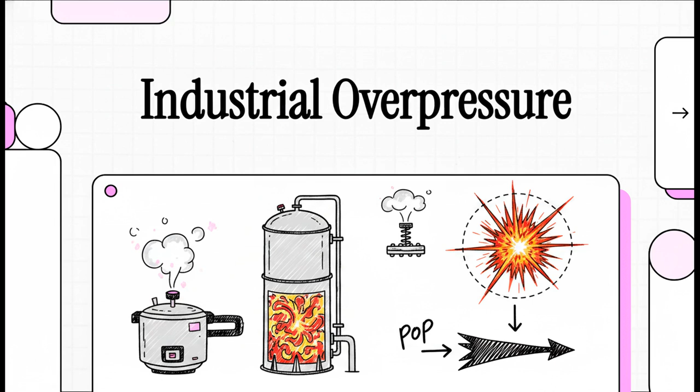Today, we are unpacking the incredible, frankly invisible engineering of industrial safety, specifically looking at how facilities use highly specialized mechanical devices to prevent overpressure disasters. To really understand this, we're going to use API standards 2000, 520, and 521 as our blueprint today. We're going to cover the actual threat of overpressure, the specific pressure relief devices themselves, how engineers mathematically size those relief valves, the rules for safe installation, and finally, disposal systems like flares and drums.

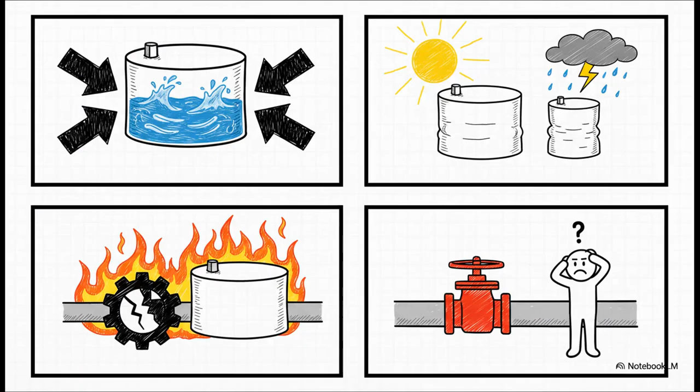Okay, let's dive into this with Section 1, the threat of overpressure, its causes and the stakes. Because honestly, before we can talk about the solutions, we really need to understand the threat itself. Why do these massive, heavily reinforced steel tanks even need venting in the first place? Well, the standards outline several primary scenarios that cause internal pressure to spike dangerously high, or, and this is just as bad, drop so low that it creates a crushing vacuum.

First, you've got simple liquid movement. Just pumping massive volumes of fluid into or out of a tank displaces the vapor space inside. Then you have extreme weather. Imagine a sudden drop in temperature or a heavy rainstorm that can rapidly cool a tank, condensing the vapor inside and instantly creating a vacuum. We also absolutely have to plan for external fire exposure, which essentially boils the liquids inside the tank like a kettle. Furthermore, you've got equipment failures.

Think of a choke collapse in an oil well that suddenly unleashes this massive high-pressure flow. And finally, human error during maintenance. This includes things like inadvertently leaving isolation valves closed or steaming out a vessel to clean it, which causes drastic pressure shifts. So you can see the stakes in these industrial operations literally couldn't be higher.

So how do engineers actually protect against all these scenarios? API 521 outlines a very strict hierarchy of protection. Step 1, you try to avoid the risks altogether. Maybe you design the vessel to withstand the highest possible pressure from any source. But if that's not possible, you move to Step 2. You rely on engineering controls. And this is exactly where our pressure relief devices come in. Finally, you have administrative controls, like manually locking certain valves open.

Notice the crucial emphasis here on engineering controls. While automated instruments and administrative safety procedures are fantastic, they are absolutely not a substitute for physical mechanical pressure relief devices. Think about it. If the power goes out or a computer completely crashes, a mechanical valve is still going to operate.

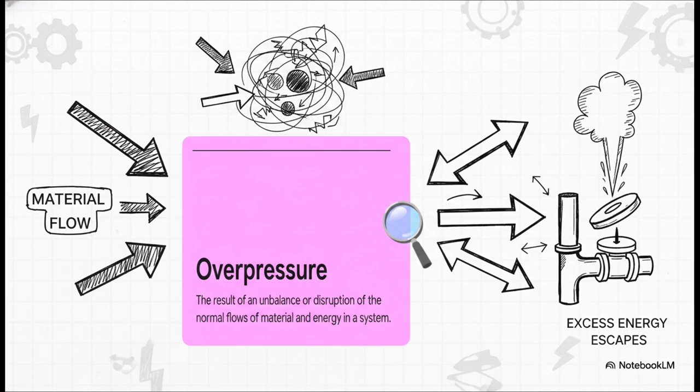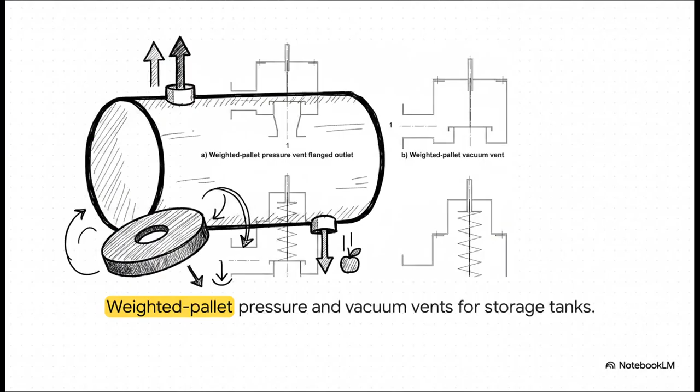Which brings us to Section 2, Pressure Relief Devices Explained. Let's look at the hardware. We are going to transition now to the physical heroes of our story. These are the mechanical devices that just sit silently on top of these tanks for years, waiting to pop open and save the day. Consider the direct-acting weighted pallet vent valve. It's an incredibly elegant piece of engineering used for low-pressure atmospheric storage tanks.

It literally uses the physical weight of the pallet, that flat disc you see sitting over the opening right there, to keep the device closed. The valve remains perfectly, completely sealed until the internal pressure of the tank literally overcomes gravity, physically lifting that heavy pallet off its seat to let the gas escape. Simple, right? And this brilliantly illustrates the next evolution. Because what happens when we need to contain much higher pressures?

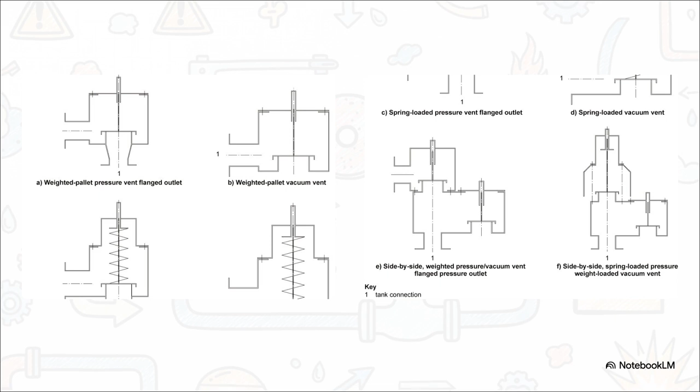You can only make a lead weight so heavy before it becomes completely impractical to use. So for higher pressure thresholds, engineers swap those weights out for heavy-duty springs. A spring-loaded pressure relief valve uses a compressed spring to push down on the disc. When the system pressure exerts a force greater than the spring's preset tension, bam, the valve is forced open. And once the pressure drops back down to a safe level, the spring snaps it right shut again.

Now let's look at a much more advanced piece of hardware, the pilot-operated vent valve. Unlike the direct-acting valves we just looked at, these are soft-seated for premium tightness. Here is the really genius part: the top of the internal piston actually has a larger surface area than the bottom. Because of this, the process pressure actually works with the valve to hold it shut. The force holding the seat closed actually increases as the internal pressure rises. It is literally tightest right up until the exact moment it needs to open.

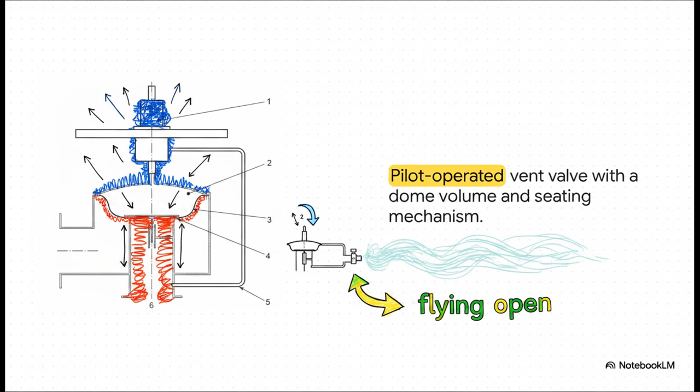At that specific set point, a tiny external pilot valve pops open, venting the pressure from the top dome, which suddenly reverses the forces and allows the main massive valve to fly open. It is such a cool mechanism.

But before we move on to the math, you definitely need to know about a concept called simmer. This is the audible or visible escape of fluid between the seat and the disc that happens just below the set pressure, right prior to fully opening. You can kind of think of it as the warning hiss of the valve. It's basically telling the operators, hey, the system is right at its absolute limit, and I am about to fully pop open.

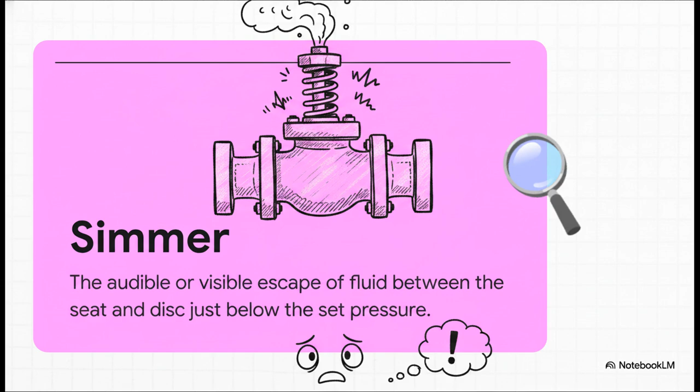All right, let's move to section 3, sizing the relief valves. The math. How do engineers actually calculate the exact size of these valves so they can handle the massive flows required during an emergency? Because if the valve is even a little too small, the tank will still rupture. Well, the very first step is knowing exactly what you are venting.

API 520 dictates that valves must be tailored with specific trims depending on their relief medium. Ask yourself, are you venting pure gas, pure liquid, or maybe a chaotic, completely turbulent two-phase mixture of flashing liquid and vapor? You absolutely have to select the appropriate trim, otherwise the valve might become unstable. It could end up fluttering open and closed violently, basically destroying itself in the process.

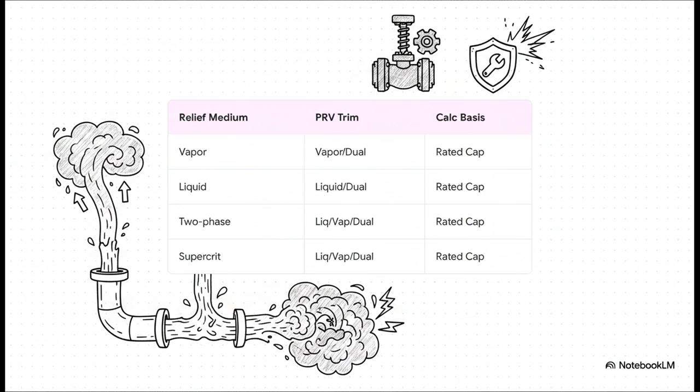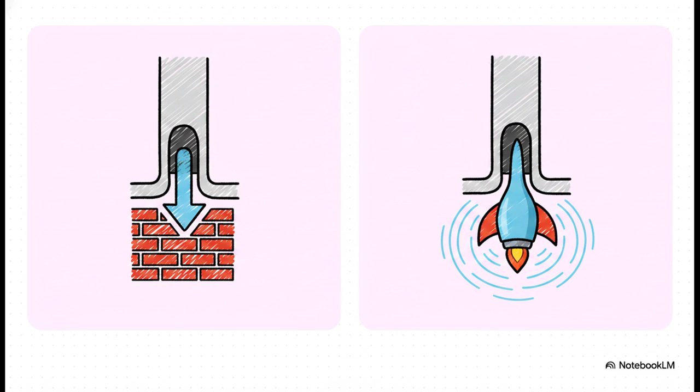Now, when sizing these valves for gases, engineers have to determine if the flow is subcritical or critical. In subcritical flow, the pressure downstream in the discharge pipe kind of acts as a bottleneck, affecting exactly how fast the gas can escape. But in critical flow, the pressure difference is so extreme that the gas actually reaches the speed of sound as it exits the nozzle. Think about that for a second. At that point, flow reaches a maximum velocity. It literally cannot go any faster, meaning downstream pressure no longer restricts the flow rate at all. Knowing this is absolutely vital to choosing the right sizing formula.

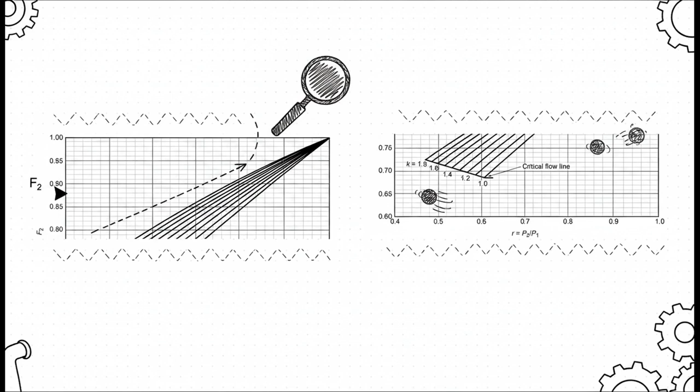Now, what's really interesting about this slide is how engineers actually figure this out. While these precise API curves might look a bit intimidating, engineers rely on them every day to find exact mathematical correction factors, like the F2 values shown here. Every single gas has a different specific heat ratio, and these curves allow the engineer to pinpoint exactly how that specific gas will behave under critical or subcritical conditions. It saves them from having to do incredibly complex calculus on the fly.

Ultimately, all those super dense formulas in API 520 Part 1 really just boil down to this. You take the required flow rate and you multiply it by these specific correction factors. You've got KD, which is the effective coefficient of discharge, KB, which corrects for back pressure that might be pushing against the valve, KC, which is a capacity correction if a rupture disc is installed below the valve, and the Reynolds number, which is incredibly crucial for accounting for the viscosity of thick, sticky liquids. Once you apply all these factors, the equation spits out the final required discharge area. That minimum required area is what guarantees the valve is physically large enough to save the vessel.

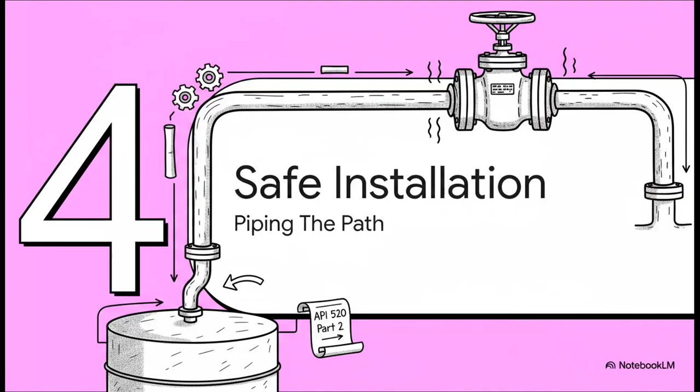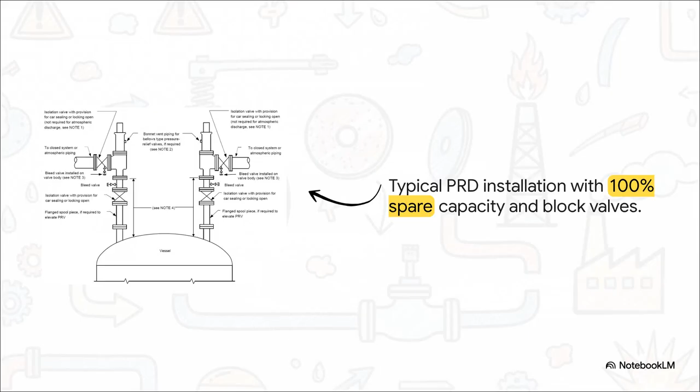Okay, Section 4, Rules for Safe Installation. Piping the path. Because having a perfectly sized valve is completely useless if it's installed improperly. So let's shift our focus to the crucial piping that connects the valve to the tank, referencing API 520 Part 2. In a true gold standard installation blueprint, you will usually see two pressure relief valves installed side by side.

This provides 100% spare relieving capacity. Right below the valves, you'll see isolation block valves. By using strict administrative controls to manage these block valves, operators can actually isolate one relief valve, take it completely off the tank for testing and maintenance, all while the second valve remains fully active. So the tank is never, ever left unprotected.

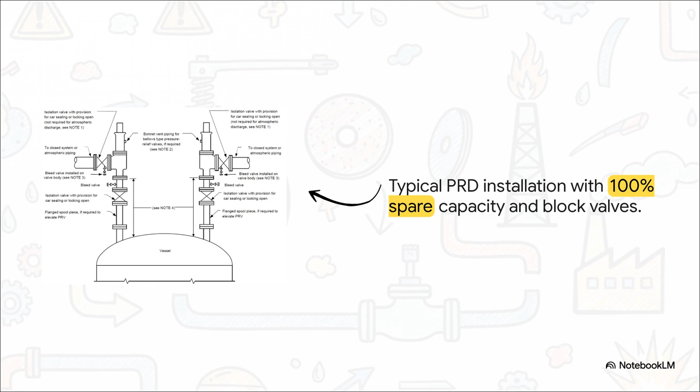Let's actually trace the fluid's escape journey during an emergency. It originates down in the vessel, then travels up the inlet piping. Now, this inlet piping is critical. It must be strictly managed, kept extremely short and wide. If there's too much friction or a sudden pressure drop in that inlet pipe, the valve will open, the pressure in the pipe will plummet, the valve will slam shut, and then the cycle repeats almost instantly. This is a phenomenon called valve chatter, and it is so violent it can literally tear the piping apart.

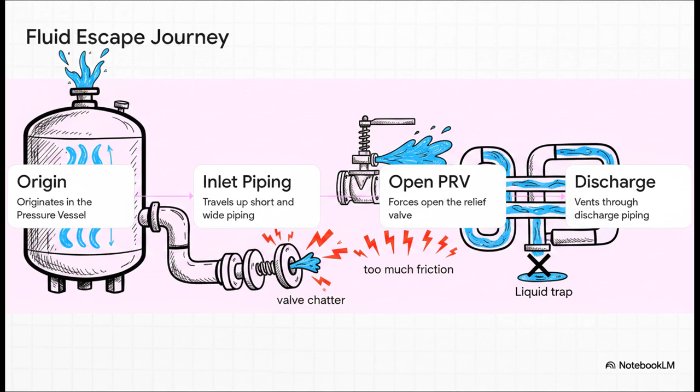After successfully forcing open the valve, the fluid blasts through the discharge piping. This has to be routed perfectly to avoid creating any low spots or liquid traps where fluids could pool and block the flow. And speaking of that discharge piping, engineers must always beware of back pressure. There are two main types to worry about here. First, superimposed back pressure, which is pressure that's already existing in the discharge pipe before our valve even opens. And second, built-up back pressure, which is the pressure created by the explosive release of the fluid itself.

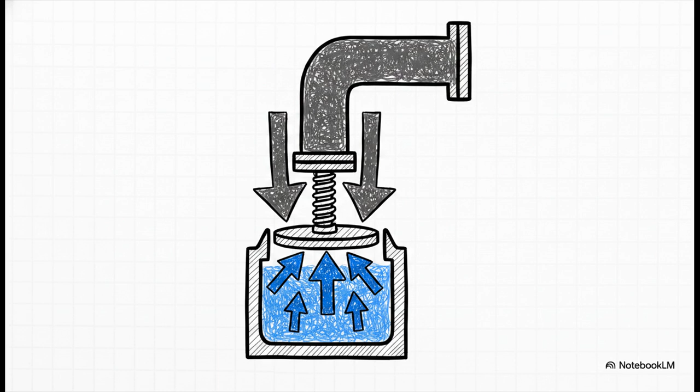If the discharge pipe is too small or routing is too long, this back pressure can actually push back down against the top of the valve disc, effectively defeating the entire safety system and preventing the valve from relieving the tank. It's a huge hazard.

And finally, Section 5, Disposal, Flares and Drums, the Aftermath. Okay, so our valve is opened, the math was spot on, the piping held together, and the tank is safe. But that introduces the final stage of the journey. Once thousands of pounds of boiling, dangerous fluid escape the tank, where does it safely go? I mean, you obviously can't just dump it out into the employee parking lot. Releasing raw, highly toxic gas directly into the air is incredibly dangerous. So plants usually use giant combustion flare systems to safely burn the vapors, converting them into much less objectionable compounds.

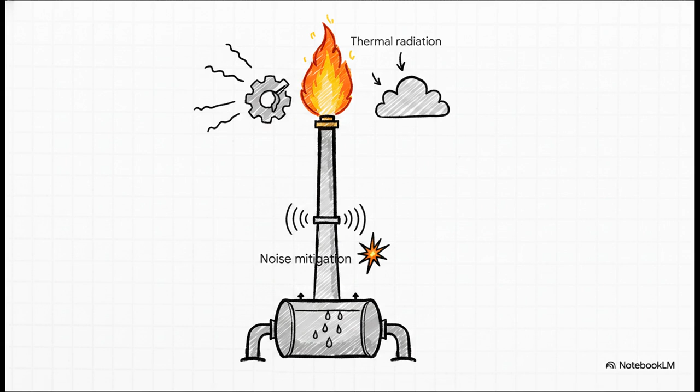But designing a flare, as detailed in API 521, is highly complex. Engineers have to calculate the safe dispersion of the plume. They have to measure thermal radiation to ensure the intense heat from the giant flame doesn't melt nearby equipment or worse, harm personnel. They must mitigate the roaring noise, design ultra-reliable pilot ignition systems, and most importantly, they absolutely must utilize knockout drums to remove any liquid before it ever reaches the flame.

And just how big do you think these knockout drums need to be? 20 to 30. That number right there represents the exact minutes of emergency liquid flow that a main flare knockout drum is staggeringly scaled to hold safely. Flares are designed to burn gas, right? Not liquid. If a massive slug of raw liquid hits the flare tip, it can literally rain flaming droplets down onto the plant below. To prevent this nightmare scenario, the knockout drum acts as a massive speed bump, completely separating the liquid from the gas and holding up to half an hour's worth of catastrophic emergency liquid flow.

Now, not all systems use flares. Some actually use atmospheric venting, releasing the gas directly into the air. But make no mistake, neither option is just a simple open pipe. Both require intense, rigorous engineering to prevent hazards. Flare disposal relies on combustion, but requires that massive upstream liquid separation we just talked about. Atmospheric venting, on the other hand, skips the flame entirely, but because the toxic vapors aren't being burned away, it requires incredibly strict droplet size control and advanced dispersion analysis. They have to guarantee that a hazardous, completely invisible rain doesn't just fall down onto working areas or neighboring property.

Wow, okay, we've covered a tremendous amount of ground today in this explainer, from the terrifying causes of overpressure to the intricate mathematical sizing of the valves, and finally, to those massive flare systems that neutralize the ultimate threat. So I want to leave you with this thought. Next time you drive past a refinery or a chemical plant and you see that big flame burning high up in the sky, will you just see pollution, or will you see an expertly engineered, meticulously calculated safety system actively doing its job, safely managing energy balances and preventing a massive, catastrophic disaster?